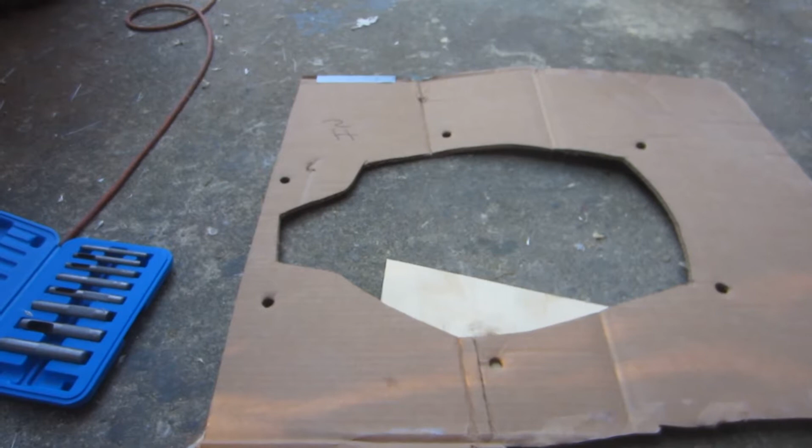It's time to start thinking about a transom shield cutout. Lucky enough, over the winter I bought myself these brand new hole punches. I hated doing these holes in gaskets and such before, but this has been so cool. Just put pow pow, it's done.

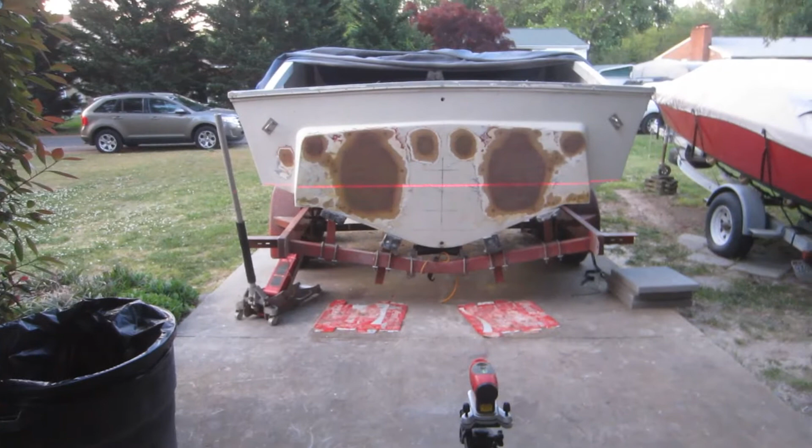Well, time to move on to the transom. A little odd starting out a new day at night, but that's what was needed this time. Either that or I have to get up at 4 o'clock in the morning and come out here and do this, which would just be odd all by itself.

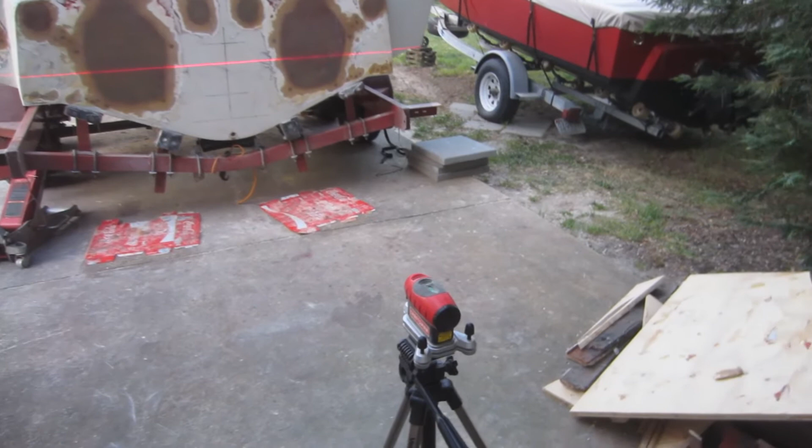So I just waited for dusk, got out my laser level, probably from the 1990s sometime, and we're trying to find what is exactly level. I'm going to start working off the chines. I'm going to do these 2 chines, and then go down to the next line down here, the next chine.

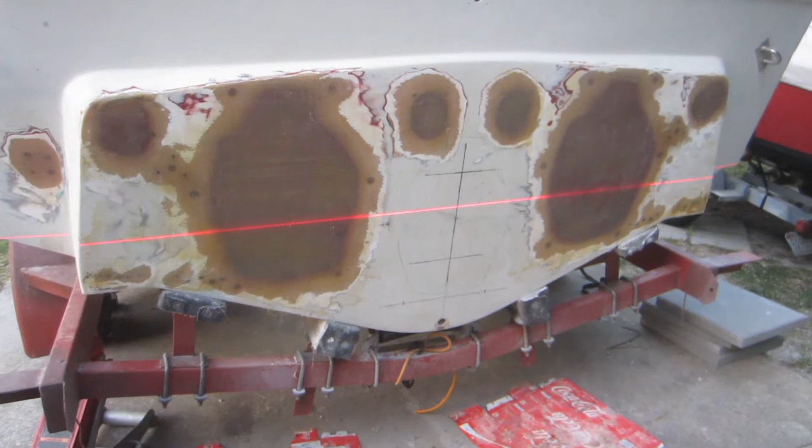And see what lines I get. I'm thinking they were off by a millimeter or two, which isn't so bad, but I could also be off by a few millimeters too. This will definitely mean what is level with the boat. We're going from chine to chine across, and then hitting that next chine again. Like I said, we'll definitely have 2 parallel lines to work with, and from there we should be able to do the cutout square. At least that's the plan.

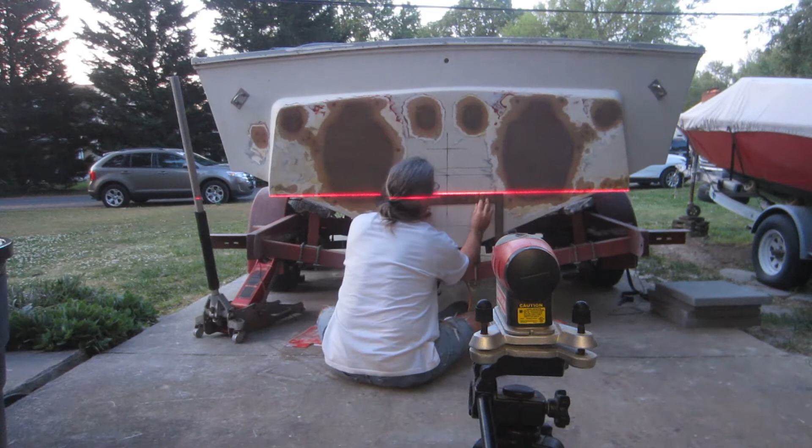Alright, if we can turn the sun back on. Now that's the way you start a new day. We've got our lines. They look a little crooked right now because the boat actually has a tire going down on this side, which makes it sit a little crooked. But our lines are level to our chines, as we did in the darkness.

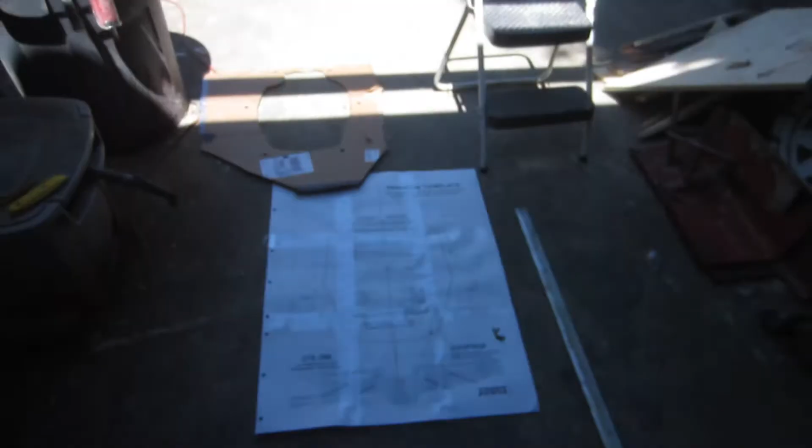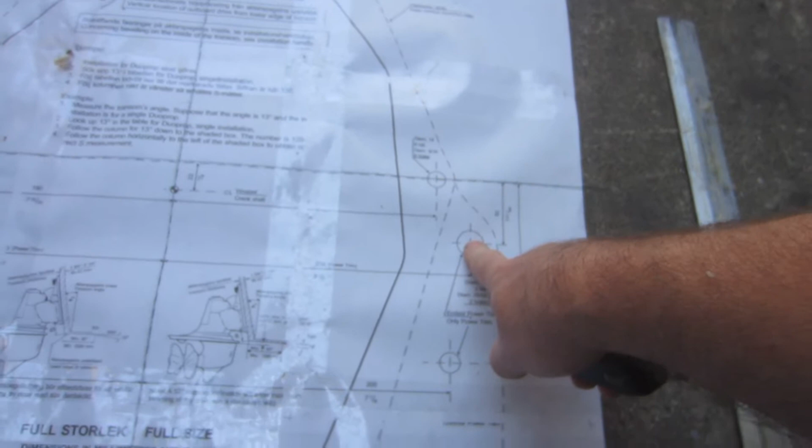And then I decided I wasn't going to trust myself or what was in the boat before, or anything from anybody. So I went online and got myself a template. This is actually a Volvo 280, 270, and pretty much probably all Volvo Pentas cutout. The beautiful part is this is the part for the 280T, which makes this one hole very easy to find. That's what's going to be different between my jury-made cutout and what they already had. Not only that, but the 280T needs a bit more relief.

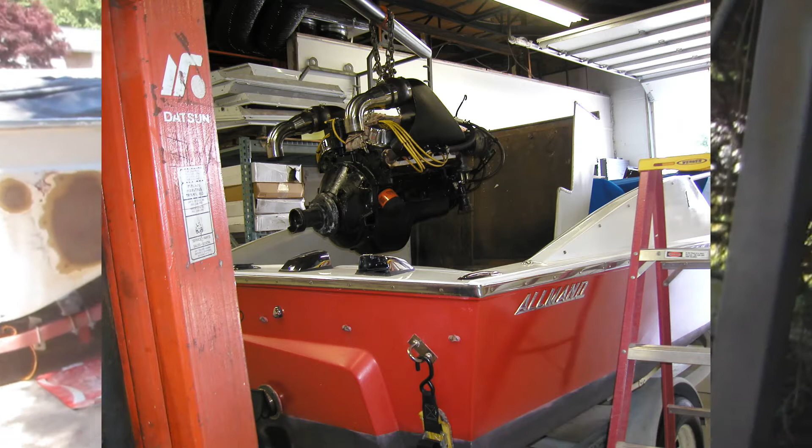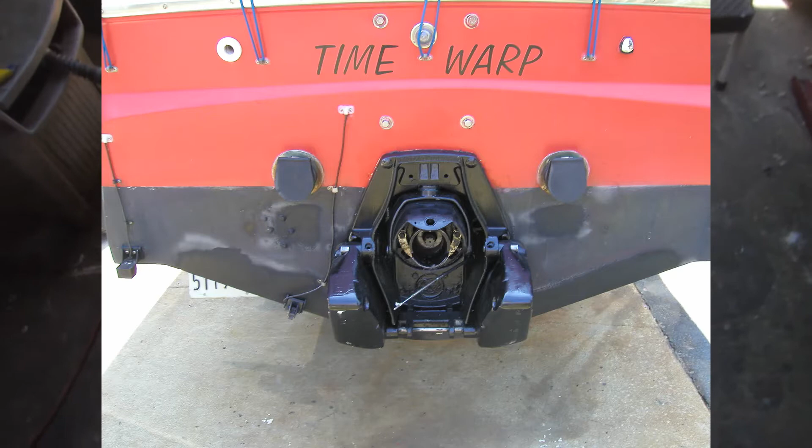But I do remember that when I actually put that in my 19 over there, there was some actual trimming. It wasn't necessarily any real cutting, but there was some trimming, we'll put it that way. The only thing I'm not really keen on with this cutout is that I see they kind of square these off, and if you look at mine, it has this dog leg here, and I've already been trimming on it. This actually fits over the transom shield we have in the garage, and it leaves this dog leg here.

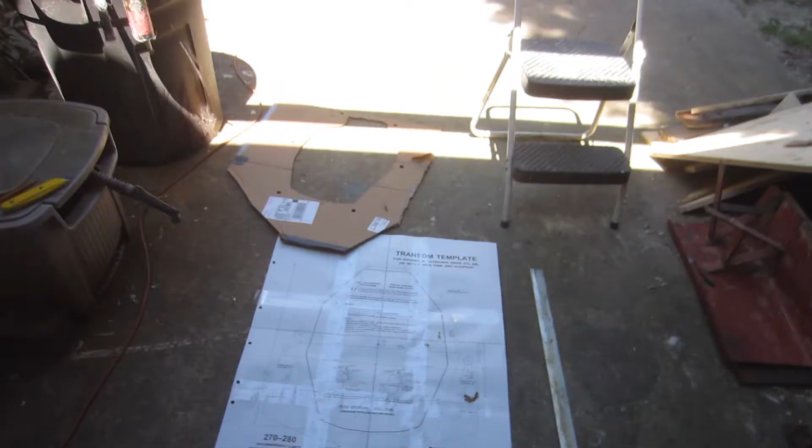Now, I'm not going to do anything as extreme, but I am going to leave a little bit more meat right here and right here. As you can see on the original cutouts, they're almost a little tiny thing up there. I'm going to leave a lot more than that so our steering arm can move around. But I think this template, along with laser leveling the hull itself, is probably going to be the best Volvo install that's ever happened to an Allmand SuperNova.

I'm pretty confident in this. We'll see when I actually go to put the transom shield in how confident I am, but until then, it's time to do some marking, and lots of marking.

We've done an insane amount of measurements, an insane amount of this, and second guessing has been going on for days on whether I want it lower or higher or this or that. Mine's perfect in my boat, so I'm putting it exactly where it is in this boat. But I didn't want to get the outdrive cocked a tiny bit away or anything like this.

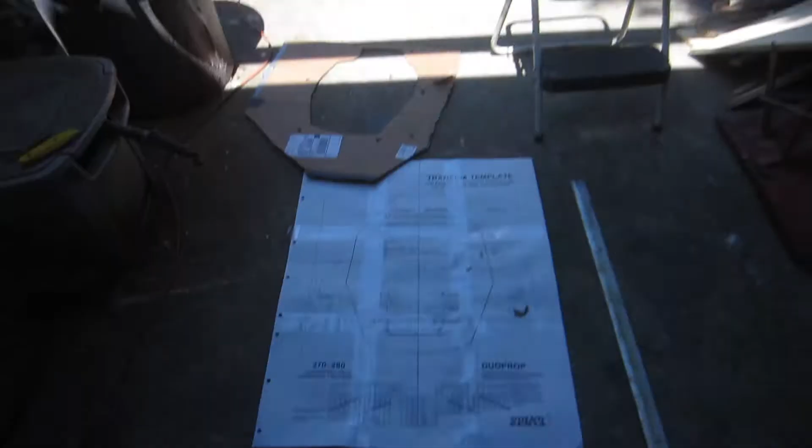Laser leveling, this pattern with actual lines on it for leveling and all that good stuff, it's going to be really hard to screw up. And I'm hoping that I don't. Starting to feel like a seamstress here. Pattern's on. Now, who's going to be the first one to make a cut? Sadly, I think it's me.

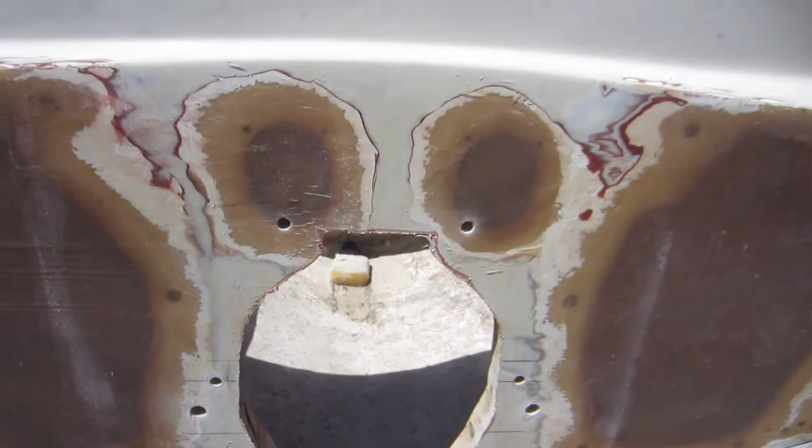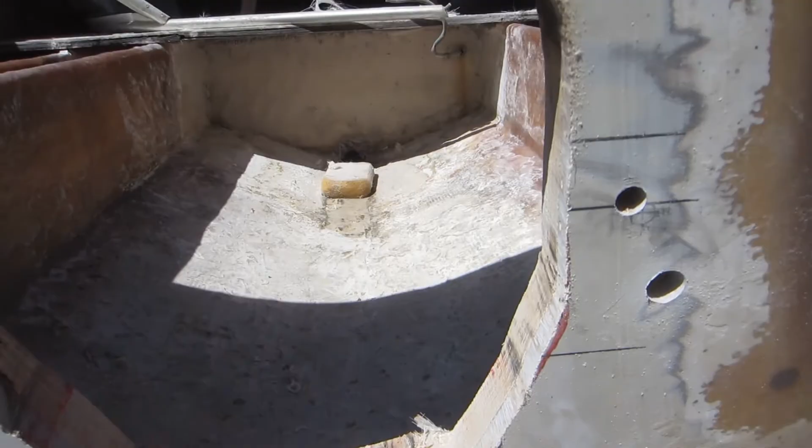Nice, nice, nice, nice. We got some cleaning up to do, but it was a good cut. Stayed away from my holes. That one's a little tight, but that's no big deal. It took 2 blades, but we butchered it out.

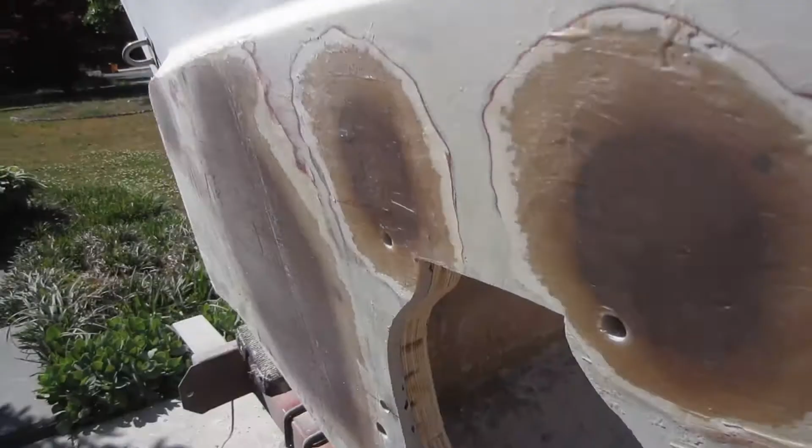Next, I'm going to use my disc grinder down here to clean up all the edges and get it ready for some glass to close it in. So we got everything cut, ground, rounded our inside edge. A little hard to tell from the outside here. Look how thick this transom is.

I'm pretty positive that's the right cutout because I've never cut out one that big, and it fits pretty perfectly on the shield itself. So we're just going to seal it up and hope and pray till we get ready for paint, and then we'll actually fit it in and make sure it fits perfectly before we paint it.

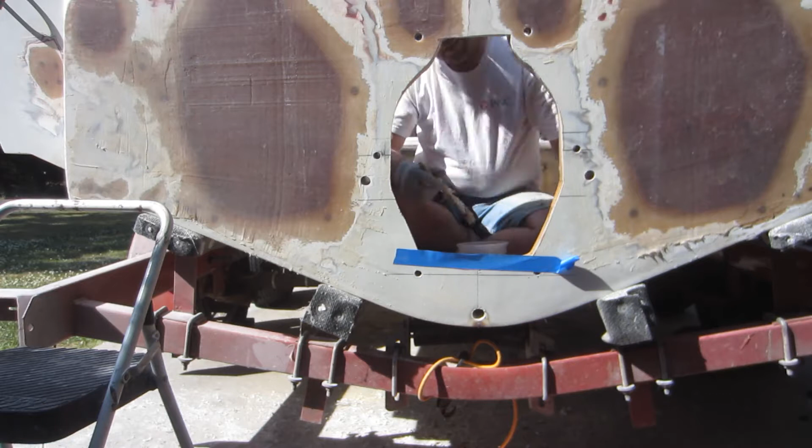For the first time in a while, I actually accomplished what I set out to do for the day. My whole day this was priority 1: get the hole cut, get the holes drilled, especially those 2 outside ones. Those are for the trim lines that go through the transom, and they've got to be right on or the seal won't catch it right.

And that's not good. Got everything sealed up all the way around inside, and even have gone as far as to pull out my Rage here by Evercoat. I really like this stuff, Rage Ultra. I mean, that stuff spreads so much like butter. It doesn't pull. It's amazing. It's really great stuff.

And of course, nobody is sponsoring me, so what's going to happen with the transom is it's going to take phases. I'm going to go over it and fill it like I would drywall, going over everything once or twice in a couple different directions. Then I'm going to wait a day or so before I actually sand it out. It gets a little gummy when you start sanding heavy like that, and I ain't going to bother with all that. I got other things to do.

And speaking of that, there's another major project that has to start, and it's underneath that tarp. So I'm just going to finish up the evening by doing another coat of Rage Ultra, I love the name, and call it a night. Come back and attack it tomorrow. Maybe do a little rough sanding off, and just a final coat.

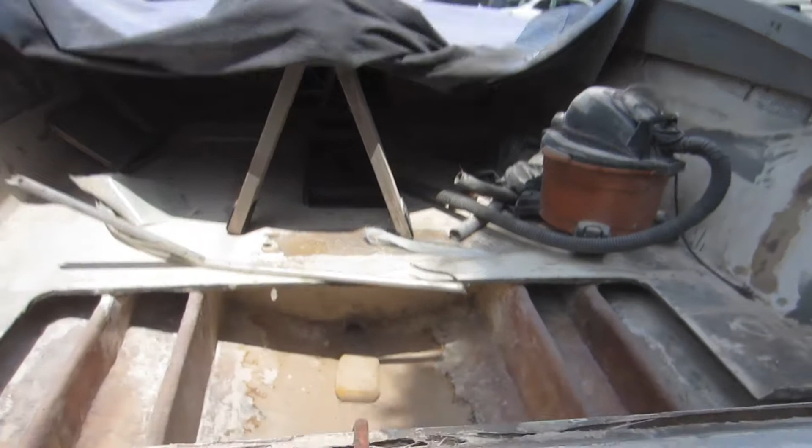But well, you looky here. That looks like a single inboard outboard, not a dual, for sure. Let's take a look inside. It also looks like a single. Whatever happened to the duals? They're all gone. So cool.

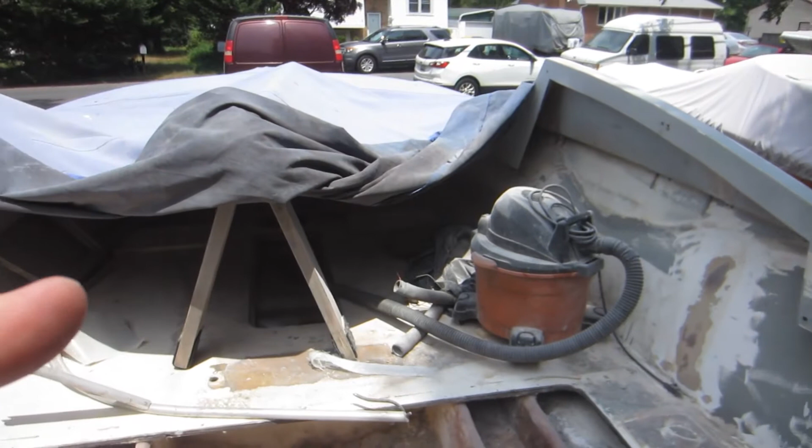Alright, back to seriousness here. We have run out of large projects, and that's not a bad thing. As I said, we did the stringers, we've done the transom, we've done the cutout. What's next is this guy here, and I'm perplexed on what to do about it. I really want to take the skin off, but at the same time there's some seat nudges in there that need to come off. There's a section missing up forward, and of course this whole giant cutout here.

I'm really not sure how to go about this, but we definitely have to see the gas tank - inside, outside, upside down, the whole 9 yards. Because there's absolutely no way we're putting this boat together with a bad gas tank in it, or one that could fail. So I guess today's goal is, even though we've gone from 65 degrees as a high 4 days ago, it is now 95 degrees, I think today is the day we're cutting the deck out.

Boldly going where I've never gone before. I've taken some inner liners and such out with Donzis, but I've never had to butcher a boat up just to look at a gas tank.

Yeah, it wasn't the end of the world. Once I got this edge up on the glass between the wood, and it was already kind of delaminating a little bit because it's been exposed to the weather, first I wedged my pry bar in down there and got it on a little bit. Then I'd put a block in and wedge a little more until I could actually get a 2x3 in there. And then I just started driving the 2x3 in, one on side by side, and just going down and listening to it snap, crackle, and pop as it was going.

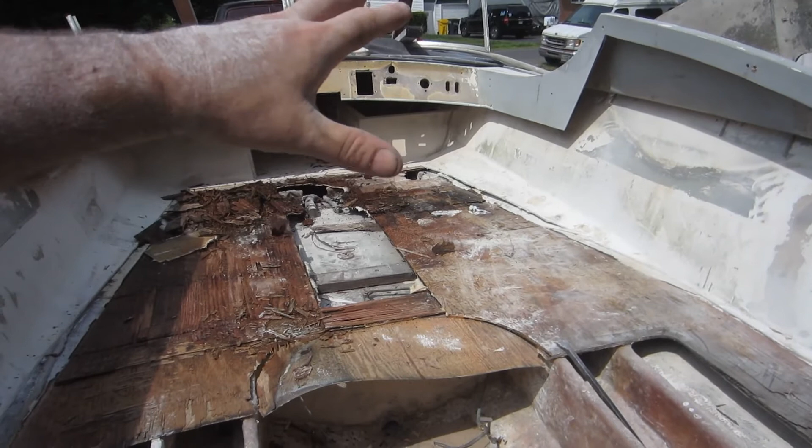It wasn't like just beat it in until it breaks. It was pull it in, and you'd start to hear it going and getting ready to pop, and then you'd hear it pop on occasion, where it actually is broken loose. Then you drive some more, and it was basically using wedging to wedge the whole plate right off, which worked out great. I ain't gonna say it would work out all the time, but that's pretty solid plywood over there, and it came off of it.

This, on the other hand, well, most of it came up with the actual board itself anyway, so not saying it's the right way to do it, not saying it's the wrong way to do it, but it's my way.

My 19 has the fisherman inner liner in it, so there's actually a hatch that you can just unbolt or unscrew 6 screws and just lift it right out, and the whole gas tank sits right there in the wide open and you can take it in and out at will. This one's a little different, that's for sure.

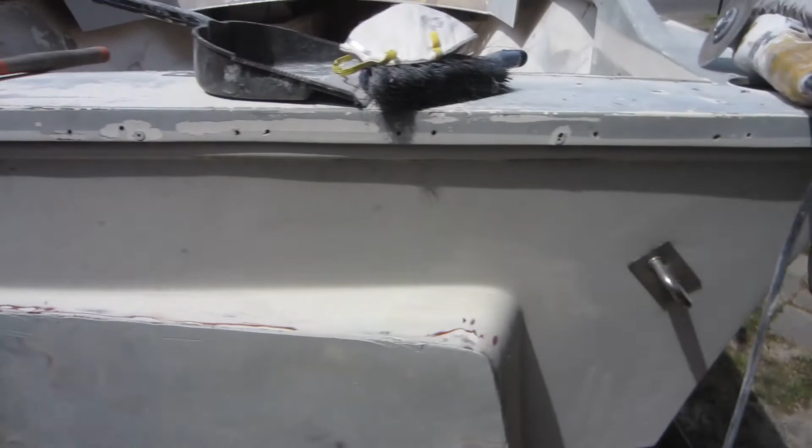And we got our fiberglass out. I know it seems a little ass backwards to do it this way, but I'm trying to actually save the fiberglass, and there's reasons behind that. One, fiberglass is extremely expensive. And two, I want to keep that hatch of some kind in the floor for access to the fuel tank.

At least you need access to the sender and such like that. I mean, if the tank's intact, we're gonna coal tar that big boy, and we're gonna get rid of the foam that's around it, because that's the Achilles heel. I think it's probably ruined just because there's foam around it. I haven't got that deep yet, but we'll get there.

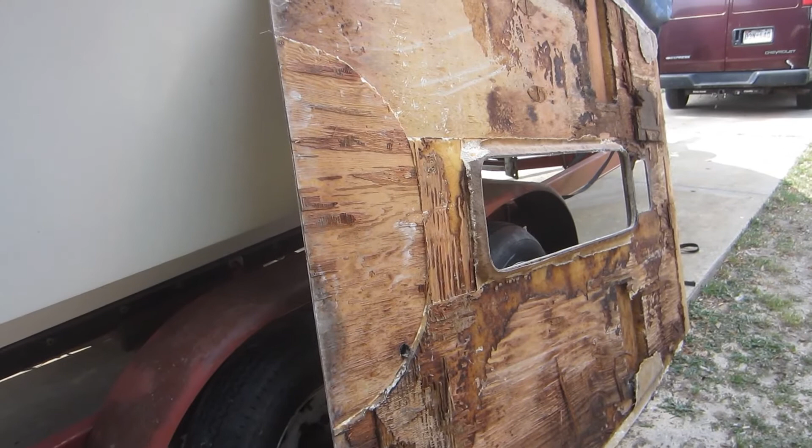But we definitely need a hatch, and I'm not going to create that hatch. I'd rather just cut it out and stick it in and then fiberglass the whole new deck around it if I have to. But I'm going to try to see what I can salvage of this, because fiberglass is extremely expensive. If I had to buy some patio blocks to put it down with, so be it. I mean, it's a whole lot cheaper.

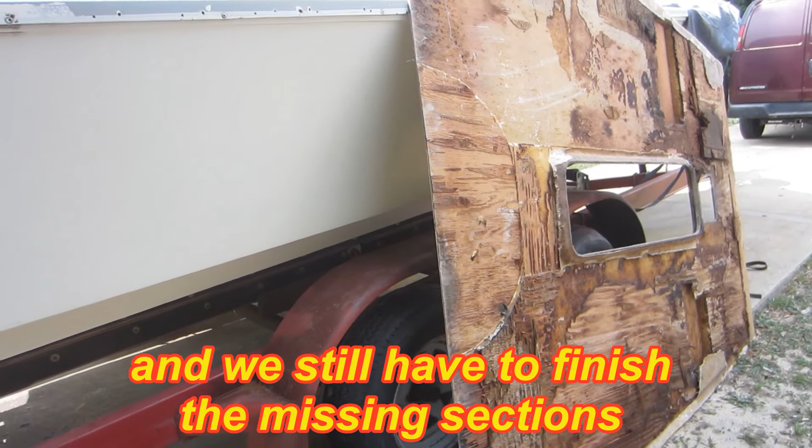To replace that deck in fiberglass, rough estimate, about $350 worth of fiberglass. Maybe 400, and then by the time you're talking about shipping, yeah, now you see where I'm going with this.

So after reaching my goal for the day, because that's what it was, to get this deck up in one piece, next of course I have to take all the wood out. It's pretty odd how some of it came up a lot shorter than I thought it would have. We're probably going to make it a little tighter than that when we replace it.

And then, like I said, we have to get to this gas tank and look at it 100%, pressure test it, see if it's got any corrosions, anything like that. If it does, it's out it goes, and a new plastic tank will go in its place, because you're not replacing these.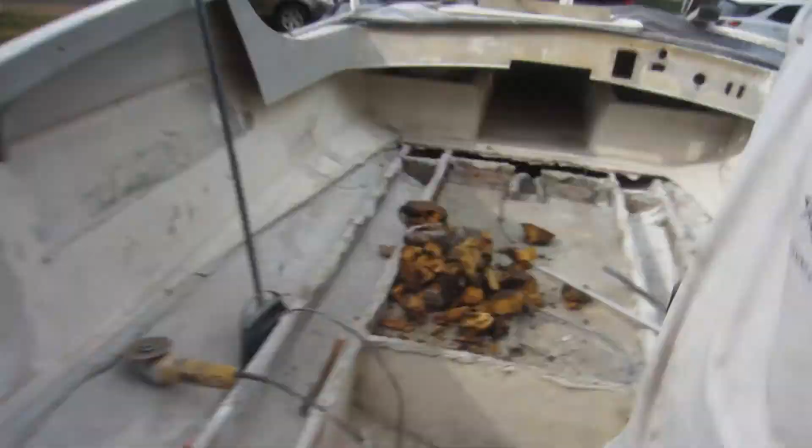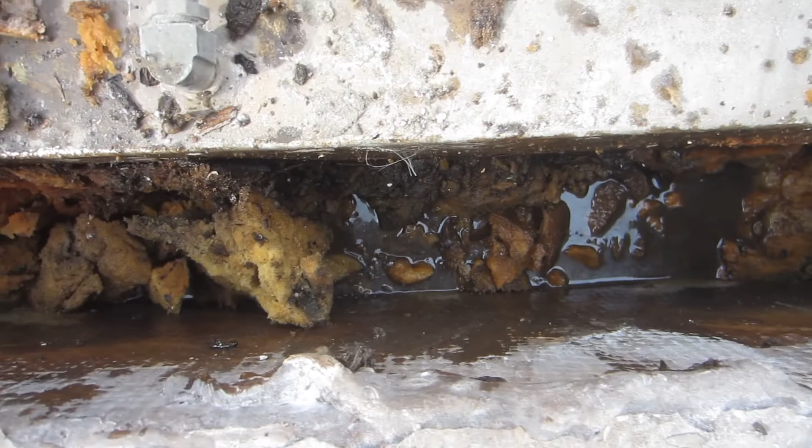I mean, seriously, look down there. That water's 4 inches deep. I don't know about this tank now. I'm real nervous. I know these tanks are almost indestructible, but man, with that foam packed against it like that for years.

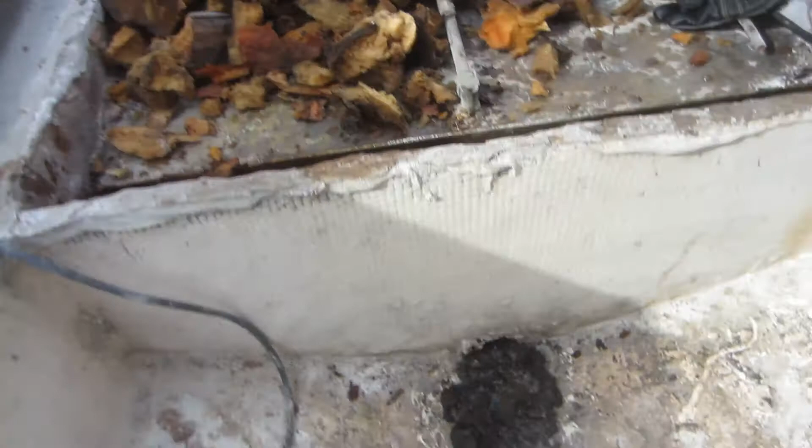Well, we have found design flaw number 1. As you see, we got a drain back here. You'd think that's right on the other side of this bulkhead, but you can't even find it. It's too far down right now. But down here about 5 or 6 inches, there's a pipe that runs under the gas tank from front to back. So they thought about keeping water out from underneath the gas tank, but they never thought about how to drain the box itself out.

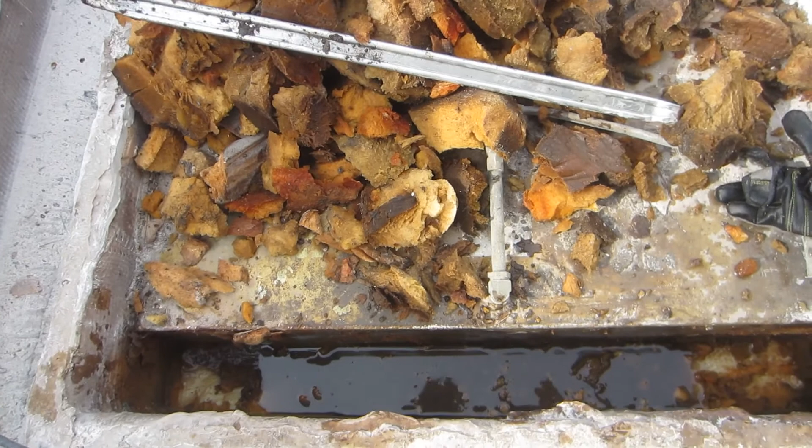That's a major design flaw there, because there was actually a hatch in here, so whenever you wash the deck off, water would go right into here. I'm sure this was from day one. And look at all this big saturated foam. I mean, look at this stuff.

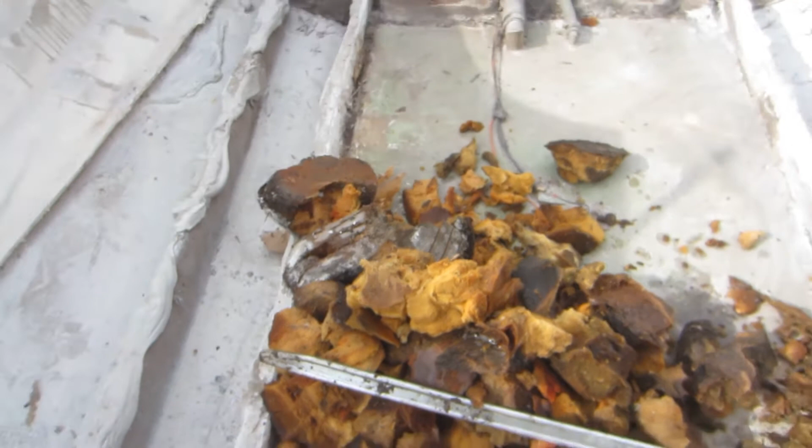That's a little stiff piece. Of course, I had to find the hardest piece in here. And look. It's just crazy. Don't ever put foam around your gas tanks. Block them in, let them have plenty of circulation all the way around, and let them be.

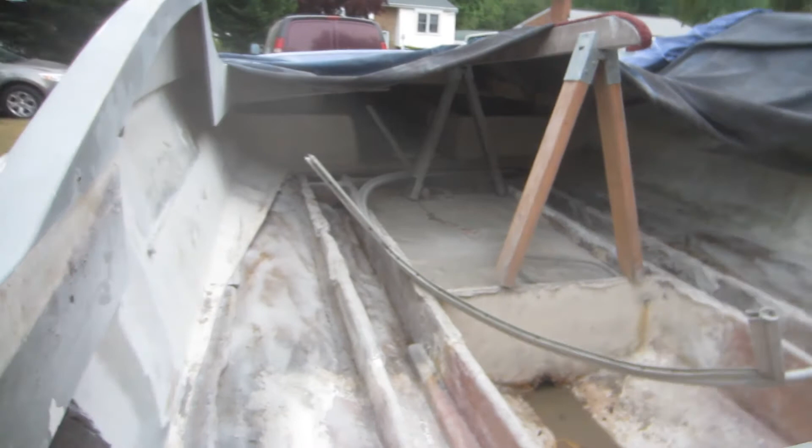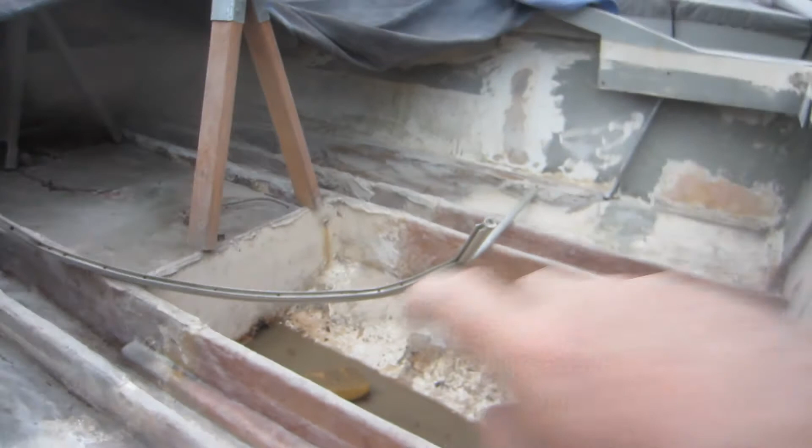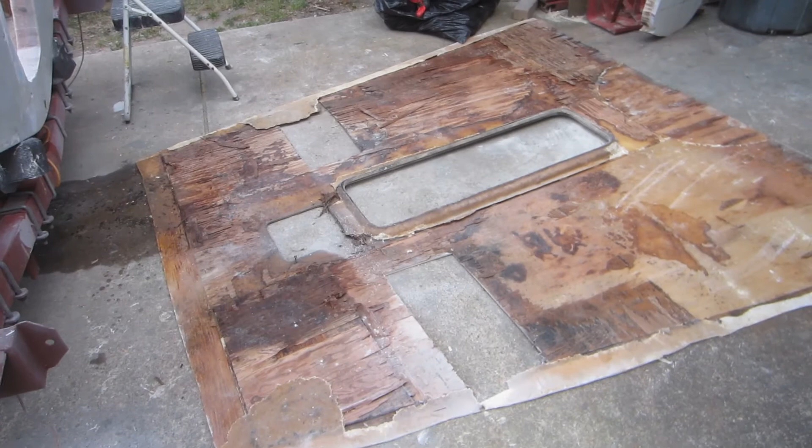Well, I made it to 8 p.m. and this is where I'm going to stop for the night. As we can see, we've got the deck out. We've done a first clean, which means basically sweeping everything out and getting all the debris out, and even doing a quick shop vac. It'll get cleaner as time goes by, as more projects go by, and we start filling in and fixing things. I'll get an opportunity to complete my stringers on their ends, which wouldn't have hurt anything, but cosmetically, in the back of my mind, I want it that way, so we're going to do it that way. And in the process of shuffling everything around, we got our deck laid out upside down here.

We went ahead and took the seat pedestals off. We're not going to use those anyway. We have seats, but we don't actually have the ones those pedestals are made for. There's a lot of cleaning off. Like I said, if I have to split this thing into like 10 different pieces and put it down like floor tile, I'll do it that way. But somehow this guy's going back in, including our hatch cut out.

And tomorrow, we got a couple ideas on how to try to get the tank out of there. I know it's wedged in, and it's wedged in to stay, but it's got to come out. We got to see the bottom half of it. With all that foam, all that water, no drainage over those years, this thing could be just as full of water that was packed in around it than anything else. So tomorrow, that's our goal.

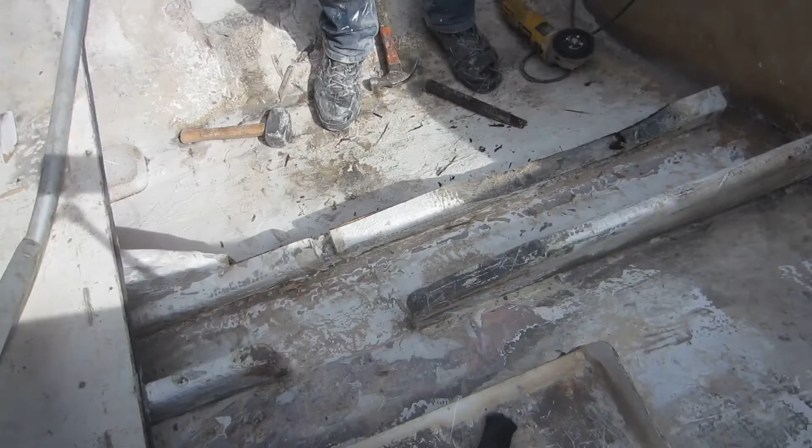Well, it's officially closed. It looks ugly on the back, but after a good sanding, it's not going to look nearly as bad. The transom is all closed in. This thing's water ready - I should say seaworthy. How's that? Still recording? I guess we are.

But just looking at the sides, it's like, oh, that's good. Not bad at all. Technically, there's supposed to be one hole in this whole top, and it's where the rear cleat goes. Well, 2 holes too for the vents, but 1 hole for the cleat, 2 vents, and that's it. And yeah, look - counting them up, it's 25 holes between right here.

Got out my laser. So I just waited till dusk, got out my...

So I'm just starting to feel a bit like a seamstress here. My pattern's on. You guys done now? Okay.

Break time. For the first time in a while, I've set out to accomplish... I don't know if I shot this already yet or not. So I'm going to do it again. And if I did it before, I'm an idiot. And if I hadn't did it before, then I'm a genius.

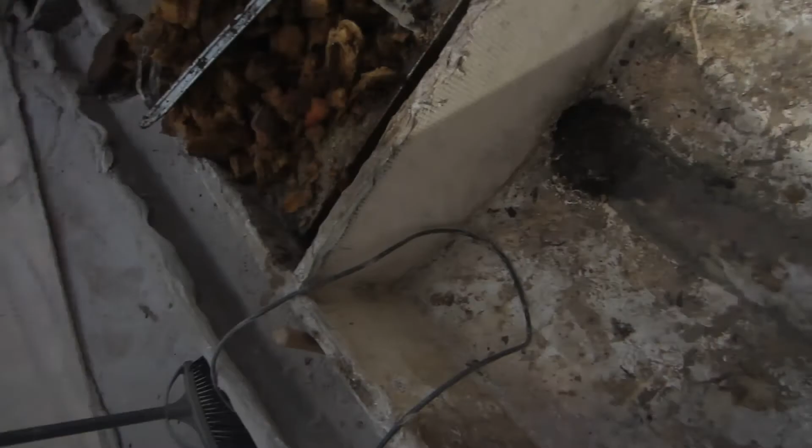This may be supplemental in some place. Got some more to do. Got lots to do.